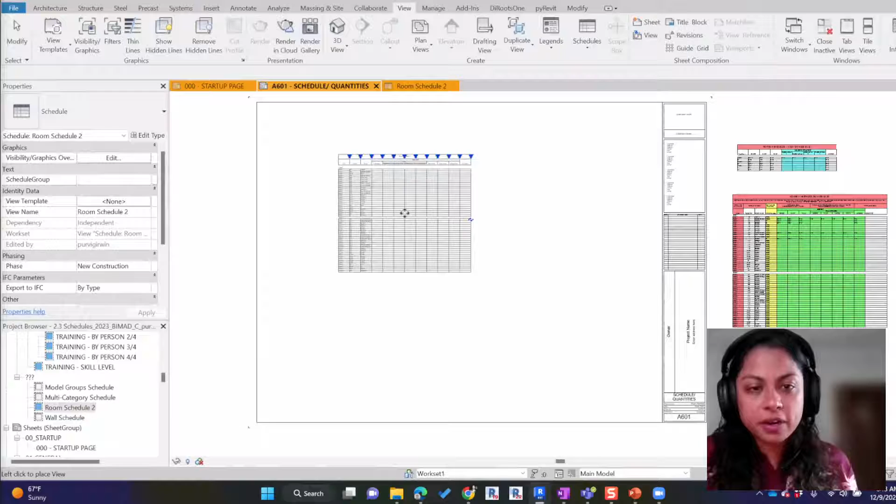Good point. All right, well then what we're going to do is take this schedule and put it on the sheet. So I have the sheet that I used for how I help organize our presentation. I'm just going to drag it up here. You can see that color on the sheet.

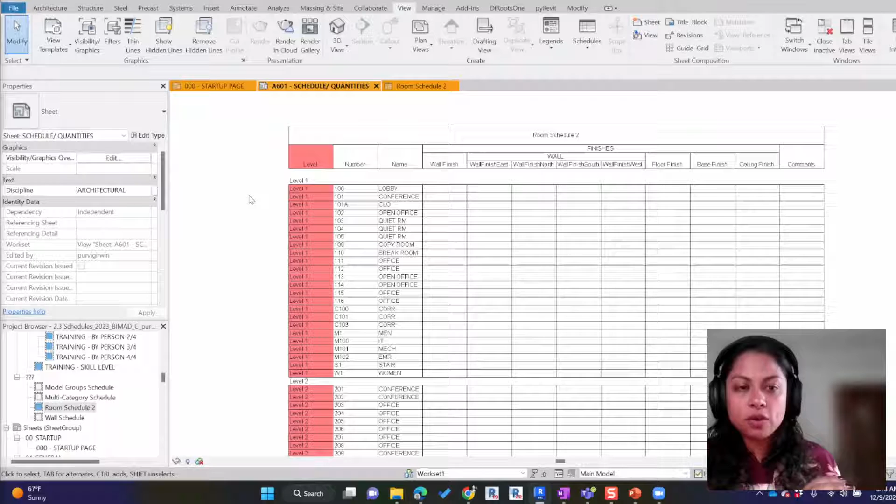Now, one thing I kind of wish Revit had was a working view and the sheet view just in one schedule, but it doesn't. And so actually this is a good sidebar into that, in that I always have a working version and a sheet version of every one of my schedules, because I'm going to show you, I have these other ones over here that I already made that have all sorts of fancy colors on them.

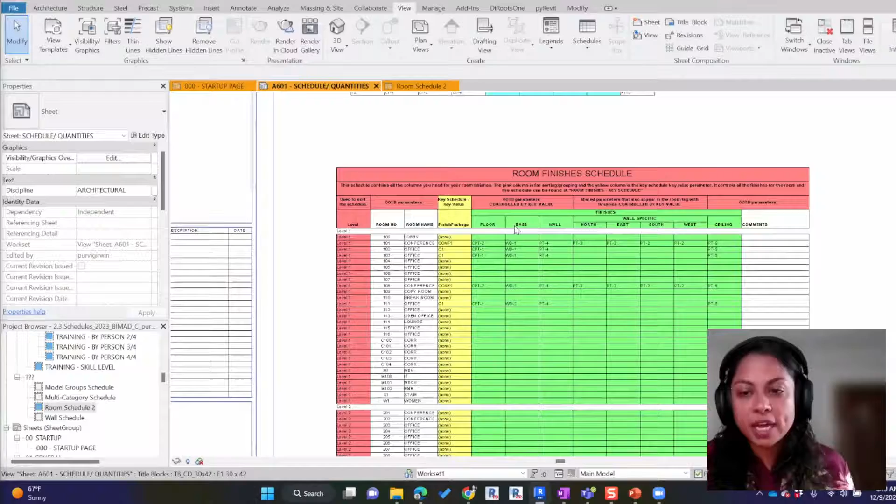You want to make sure that you have a place to share what the schedule is for. I am a huge proponent of putting as many instructions as possible into my templates so that all users know exactly what they're supposed to do. They know what parameters are for. They know where they're supposed to go to find additional information. And so that's what this schedule here is like.

And then telling people what the parameters are doing and where they came from, so that you look at it and immediately know without having to click on things. I hate having to click 5 clicks deep to figure out what something is, because the more clicks the user has to do, the less likely they are to actually do it, right?

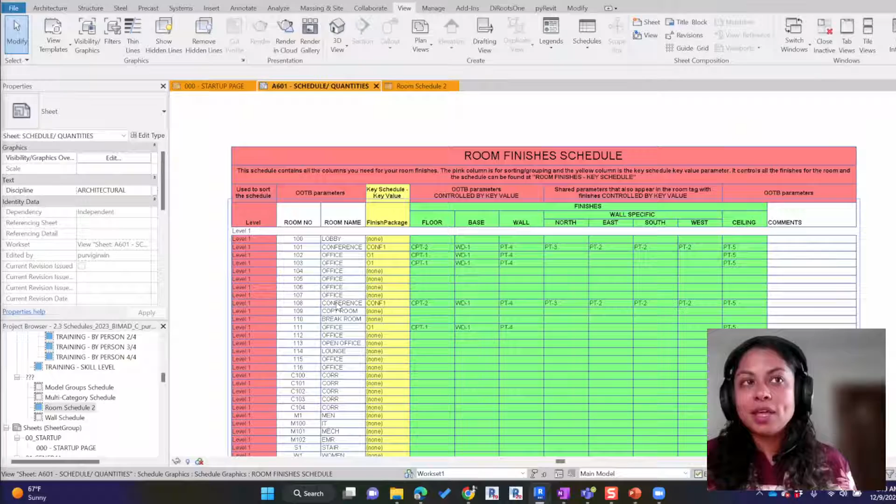I've spent my entire career trying to help people be more efficient in Revit. I started using Revit in 2008. The firm I worked at, it was like the second Revit project in the whole firm. They sent like 15 of us to Revit training and then stuck us all on the same project. We learned a lot.

Me and a friend of mine, she had learned it in grad school, so she knew a little bit of Revit already, and she and I just sort of embraced it and became the model managers after only having used Revit for like 9 months. We were like, we care, we want to make sure this is efficient, and we just took it, and everyone else was fine to let us have it. No one else wanted it, so it was fine.

But we really figured out a lot of these things to help other people understand the workflows in the software, and this is the best way, right? Because the BIM managers of the world spend a lot of time - their job is to make everybody else more efficient. And so if you can find a way to do that easily for everyone to access, then it's more likely that they're going to follow the office standards that you've put together.

The more it's just here, right? And that's why I like these working schedules. They're bright colors, you can put instructions in them. And then it also leaves the sheet ones as they are, so that your graphic standards for your company are maintained. Nobody's messing with any of the graphics of the sheet schedules. They're on the sheet already, they have the right columns, they're the right widths and everything. And all of the work happens in the working schedule.

And because of the magic of Revit, the information is in both. It's the same information, it's just shown a different way. So I like that idea.

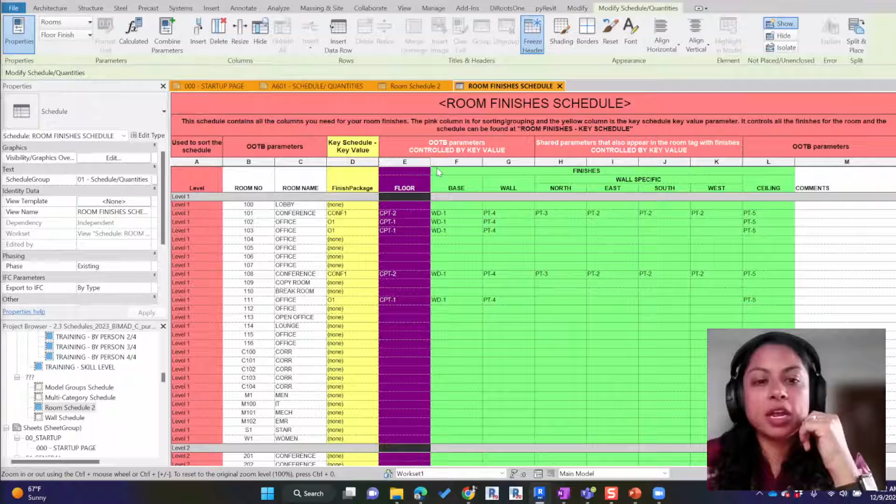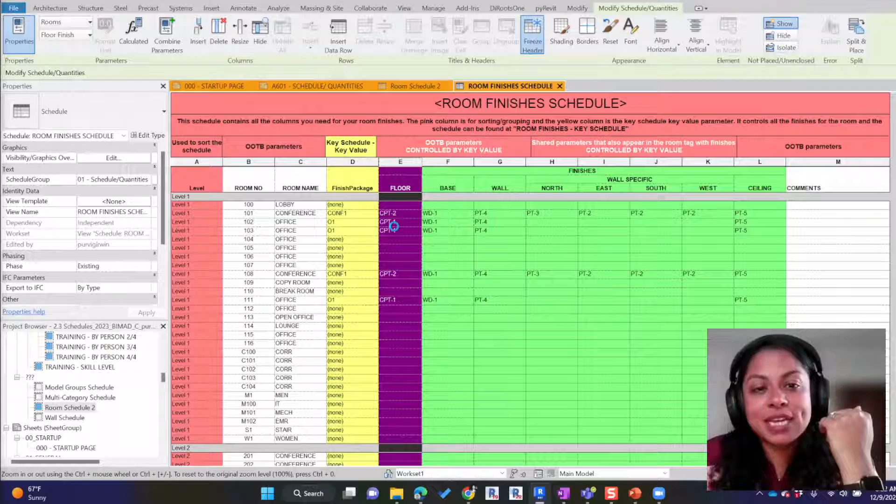For sure, I can show that. That's a good point. So if you want to make this column narrower, you could just drag it, but that's not very precise. As architects, we're probably all type A and want everything to be the same. What you do instead is select the column, go to the Columns tab, and there's a nifty resize button that tells you the current width. You can just type in, say, half an inch, and it does it.

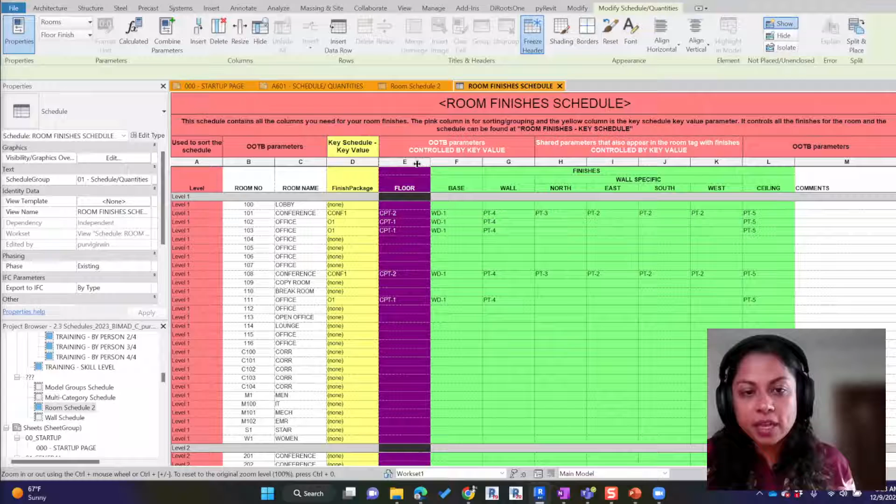Now let's undo that. Say I have all of these columns, 8 of them, and I want them all to be half an inch. I can select all of the columns, go to resize, and it tells me it's 8 inches, and I want to make it 4. It's going to equally divide all of them. It's like magic.

And so you can very precisely figure out the overall width of your schedule. I've done this for clients - they say the whole schedule needs to be 12 inches wide. So I make it 12 inches, then go back and make each column fit based on what type of information is in that column, so everything is a deliberate width instead of just dragging it, which isn't precise at all.

And it doesn't even snap, I don't think, in the sheet view. When you drag, it doesn't snap to anything. Same thing in here - you can just drag it, but it's not the most efficient way.

So I see a little bit in the chat about view templates. That was a good question - I want to give credit, but the username is 'online for 2 hours'. The question is about view templates and whether they hold the column width and stuff.

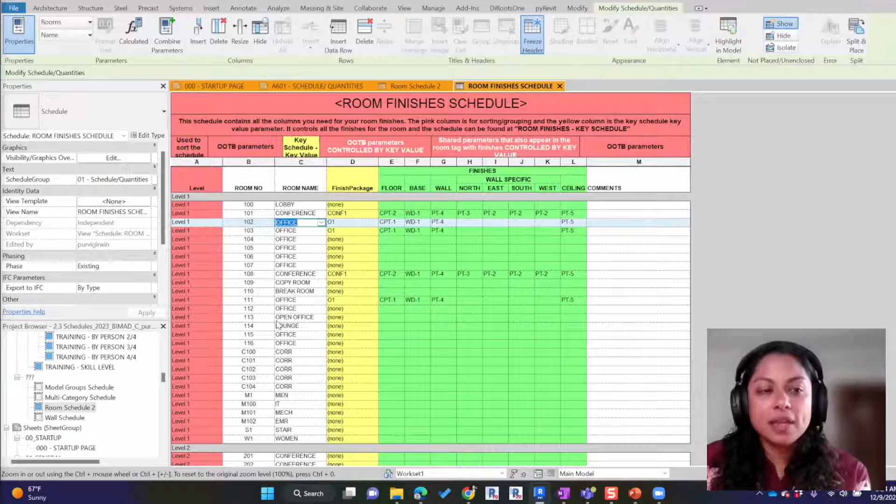That's a great question - within schedule views, what can you templatize? Let's look at view templates. If I go to schedules from my master view templates and switch to 'see schedules', you can see these are the things you can schedule. Unfortunately, you can't templatize the width of the columns - just the stuff that appears in those property tabs.

So for the most part, if I'm making a view template, I might do something with appearance, because appearance covers the fonts - like if I want to see the grid lines, the striped rows, the title, the headers, and whatever text styles are for those. That's actually really nice to be able to set.

What I discovered when I was putting this presentation together is I pulled schedules from a whole bunch of different templates and other things I've been working on, and they all had different text styles based on whatever that company wanted their styles to be named. So what I did is I made a simple template with just the appearance tab and those styles, and applied it to quickly clean up the text styles in those schedules brought in from different places.

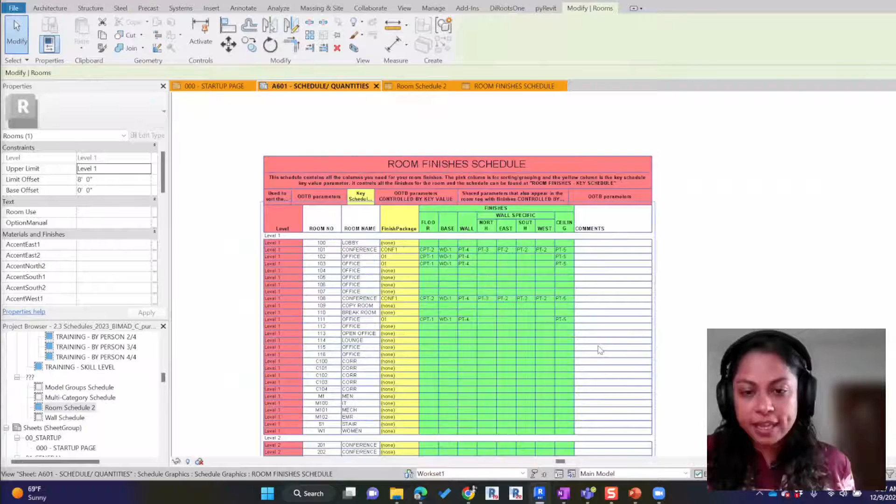In the newer versions of Revit, they made it possible to split a schedule so you no longer have the old problem: if your room schedule is too long, you'd have to filter it for level equals first floor, put that on one schedule, then do a second schedule for the second floor, and so on. You don't have to do that anymore, because now when you go into your schedule and slice it, it actually turns it into two different schedules.

Let me do it with this one so you can see it. So if I split this, now if you pull this out, you can see it's now two separate little schedules, and you can put them on different sheets.

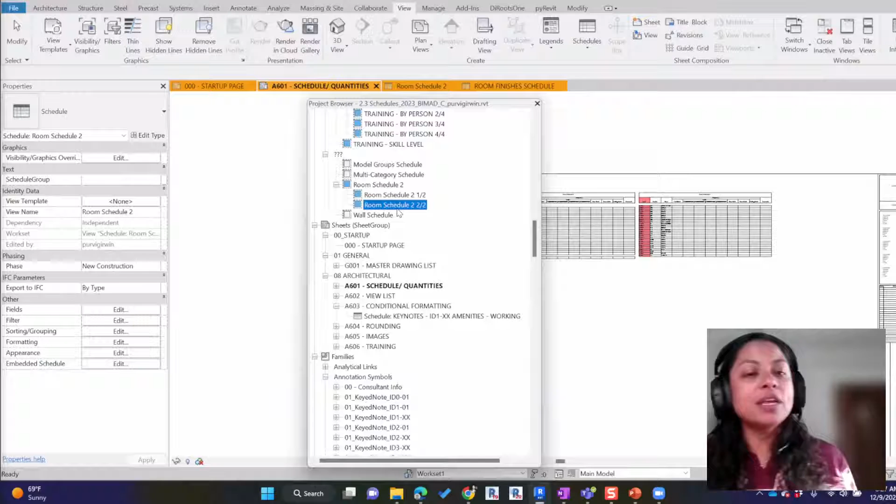That used to be something I'd have to do by hand, and now you don't have to do it anymore. You can literally just split it and put each one on a different sheet. So I could remove this one from this sheet, click on it, delete it, and put it on a different sheet. They made that much easier, so you no longer have to do the silly filtering thing.

I'll also add, for me the only time I've ever used templates for schedules is when I have a project with a lot of design options or a lot of phases. Then it makes it easier to group and hit that, because if you've got one design option as one thing, you can assign it. But if you've got different variations of design options, it's super easy to have all of those selected within that template and just use that to apply it.

Sean Page mentioned that if you create a template from a current schedule, it holds the column widths. I think I see what he's saying, but the problem is if you make a schedule that doesn't have the same columns or properties, I don't think it matters. So I'm not really sure if that's the case, but yeah.

Cool, all right, let's keep going. This is awesome. Yeah, I'm just reading through — if there's any questions I'll go through them. Looks like there's a few coming in.

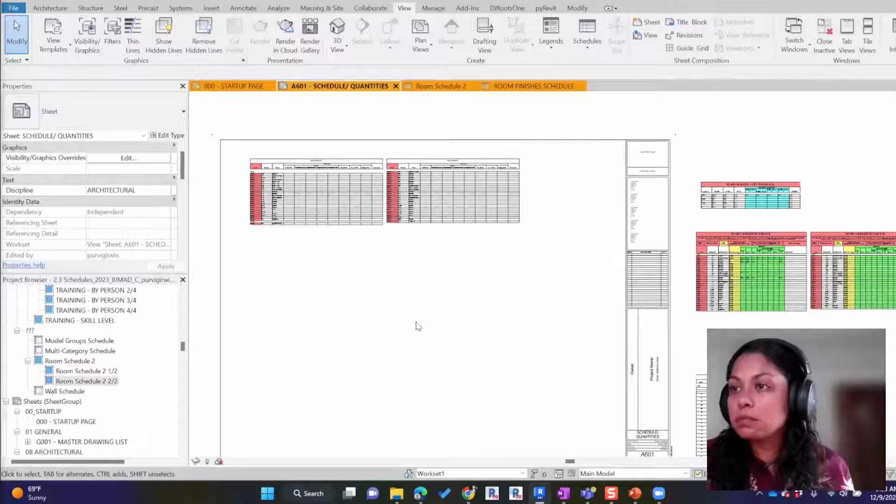Okay, somebody mentioned FF&E schedules — any hot tips for that? But I feel like maybe we should hit a couple other more basic topics before we get to FF&E schedules. Yeah, so let me go into a couple more things.

So we talked about changing the column width, we talked about adding color. One thing I want to talk about before we move into that more specific stuff is the header, because I think you saw that schedule where I had all these different rows and columns in the header, and you'd be like, oh, how did you do that?

Now this I actually didn't discover myself. I had one of my clients when I was a consultant in the U.S. I went to the office one day, and she was like, look what I found — she'd found a way online to add additional rows and columns to the header. Me and the BIM manager were both like, wait a second, hold up, what did you just do? We were like, okay, this is really cool, but before you do it anymore, let us make sure it doesn't break anything.

So I went into some research, and I found out that it doesn't break anything. So we were like, cool, and I started using it. This was back in 2018, 2019 when we discovered this.

Basically, all you do is click in the title, not the header, but the title. Then up here you can insert a row—go to insert, and choose above or below. Click here to make sure you're in the right spot, and it will add a row underneath, which you can make a little smaller.

Then if you want to merge these together, you just click and drag, and there's a merge/unmerge button up here. Like that, and you can add that information.

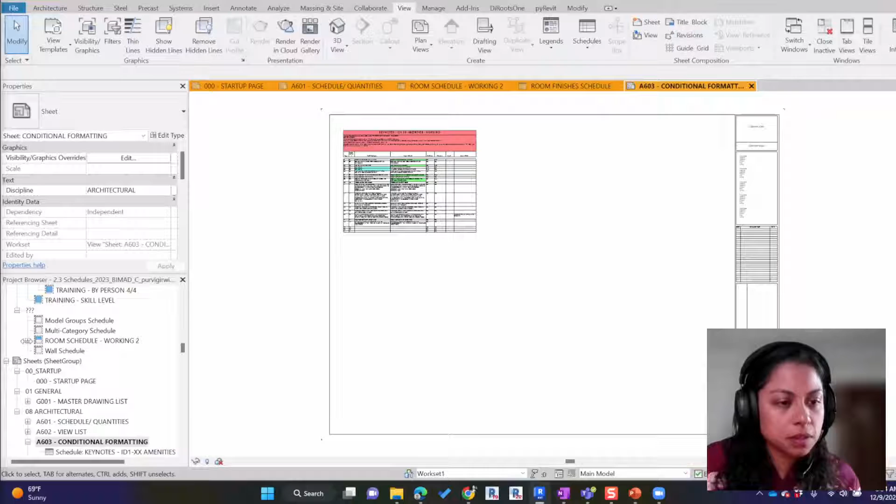This is fun, I never noticed that. I was literally just gonna say the same thing. It shows a half square. So if there's 8 of them, is it gonna show like an eighth of a square? Or is it only showing half a square? Let's see, wait this is fun. No, it's still just half.

But if you have it on two sheets now and you wanted to remerge it... so I guess like if I had this one on this sheet too, and then if I did this, it'll take it off the other sheet. And that may be kind of where Kelly was getting at. It's kind of goofy. Interesting.

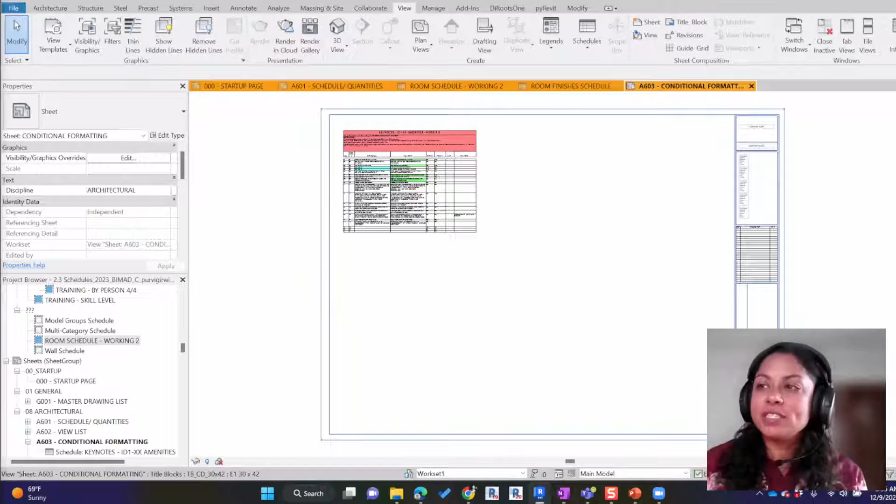I see some fun questions in the chat, and some of the answers to your questions are in my handout, which Jeff will give you a link to afterwards. Good 65 pages worth of stuff. There were two questions about character-specific stuff, so I guess maybe we could talk about that, which is one about showing a dot and the other one about showing character of a specific component.

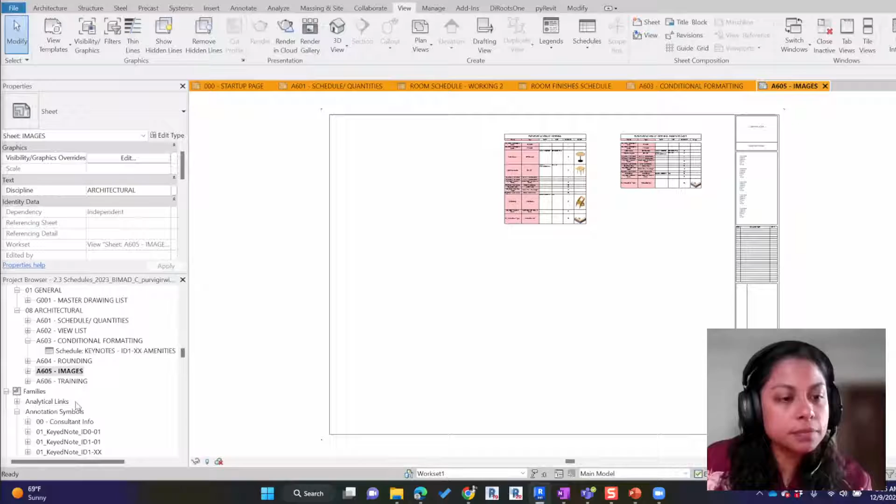I think what Joe Buchek is asking is if you were to make a schedule, like maybe a light fixture schedule where you show like a square with an X and then like a troffer, that's a graphic type of schedule. And it looks like DH Designs is asking about adding dots, which is a funny one that I went through, and we'll get into it. I could tell a funny story about dots, but first let's go through your thing.

Let's start with the dot one because that's relatively straightforward. This is my list, and this is usually where I've seen people want to have a dot - there's a revision, or I'm including it or not including it, so you have a parameter that's a yes/no parameter for the revision. Now Revit does that silly thing where if it's a checkbox, then you look at it on your sheet and it says 'yes'. It's super annoying - it's not what I want to see. I want to see a little dot.

In my working schedule - and again, this is a beautiful use of a working schedule - I have all these colors, all these different things that tell you what things are for. My purple ones are the checkboxes that are a project parameter that go with my sheets, and then this is just a calculated value. So let's go take a look at that calculated value. I'm going to edit it.

All you do is a simple if statement: if revision 1, so if it's yes, you take a special character from your character map, whatever special character you want to use, and put it in there. Because it's text, you have to put it in quotes so that it knows it's supposed to display it, a little box. Otherwise you just put 2 quotes and blank. That's it, it's literally that easy.

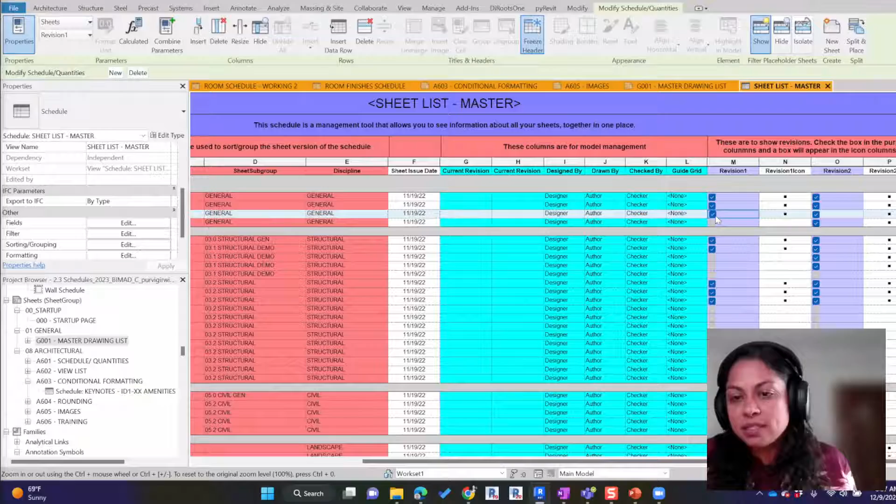So if we come here now, if I check the box, it just adds the dot, and if I uncheck the box, it takes the dot away. And that's a great example of the working schedule, because what you're doing there is creating a sacrificial column that really has the data, and then you're using the if statement to show what's needed.

The funny story I had was that Revit for a while didn't support special characters in a schedule for quite some time, and when we made the move to Revit back in '11 or '10, at this bigger firm, that was like an end-all-be-all for them - not having dots on the door schedule. They had 2-hour and dots, and we battled for a very long time. I think we eventually got them to agree to just put Y's in the schedule until we finally were able to do dots. It's a funny story because a few years later they finally let us use special characters, but I couldn't believe you couldn't just use special characters even then.

Not that I necessarily agreed that we needed the dots, but whatever. I can't remember. I mean, I guess if you could do bullets in a text box, then theoretically you should be able to do a special. Yeah, I guess it did. I know it for sure didn't support it whenever that was, because it was extremely frustrating. Because anyone at that time was looking for an excuse not to use it, so that was their excuse not to use Revit.

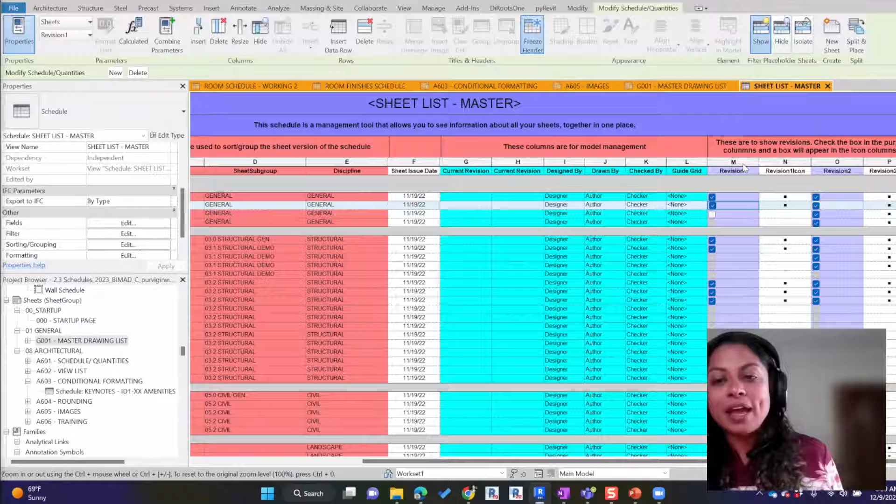So I don't know, but one important thing I do want to mention is that because it's a calculated value parameter, it's schedule specific. So this is where you need to be very deliberate about making your schedule. Usually what I do is make my working schedule and add literally every column I think I might want, then duplicate it and delete the things I don't want, or take away the colors, or hide them. So in the sheet version of this, all of these are hidden, these are hidden, these purple ones are hidden. You don't want to delete them, you need to hide them, because the formula stops if you delete them. That's a great point, it has to be there, else your formula will break. And that's the reason I make them colors, so you remember you need to hide them.

Got it. And so that is one dilemma you have to think about - if you make your working schedule and your sheet schedule and then add a calculated value parameter, you either have to add it in both places, or make a new sheet version and clean up the graphics. Which you choose to do really depends on the magnitude of the changes you need to make to your schedule. If it's one thing and it's faster to just make that parameter in both places, do that. But if you added, say, 12 revisions, it might be faster to add them in your working one and then duplicate it and change the colors, rather than remake all of those parameters. So it's really six of one, half dozen of the other, depending on your own personal skill, how fast you are at this, and how much reformatting you'd have to do. So that's just one of those 'it depends' situations.

And the working schedule - this is kind of what DH Designs had a question about, where it lives. Do you have a working schedule sheet too, or do you just keep it in the schedule view typically? No, I just keep it in the schedule view. So this particular project browser is set up based off of the presentation.

So things are grouped by the different views. But what I usually do is in my project browser, I'll have three sections of schedules. In, I think it was 19 or 20, they added the ability to do your own browser organization for schedules. So I'll have project info ones, which I actually do want to talk about, I'll have my working ones, and then I'll have my sheet ones. That way they all kind of stay together. It's done with a custom parameter I like to call schedule group - I have a group one, a sheet group one, and a schedule group one. I make them separate just so everybody knows what they're for. You could make it one and assign it to all of them, but for me it's easier to call it that thing. So that's this parameter right here, schedule group. I just do those three typically, and I put numbers at the front so it orders the way I want.

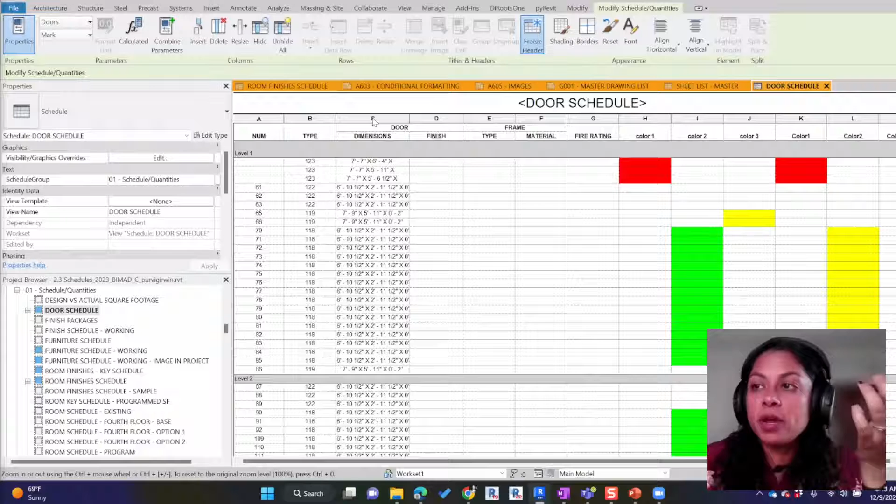The place that I use it the most is actually with door dimensions, because sometimes you might want to have the width, the height, and the thickness all together in one cell. I have that here in this schedule. Actually, let's make a new one real quick, I think it'll be a little bit easier.

Rick just mentioned schedules are a great selection tool as well. It's a good point. When you have those project information schedules, like rooms and stuff, you can select in the project information ones, then say select in model. That's super valuable too.

So I have this schedule, door number, let's make it really simple. I'm going to go in here, and this bottom button of these four is the combine parameters. You click on that, and over here you get a list of all the parameters you have. So let's say I wanted to do the width first, I'm going to add the width, then add the height, then add the thickness. Okay, so these are parameters.

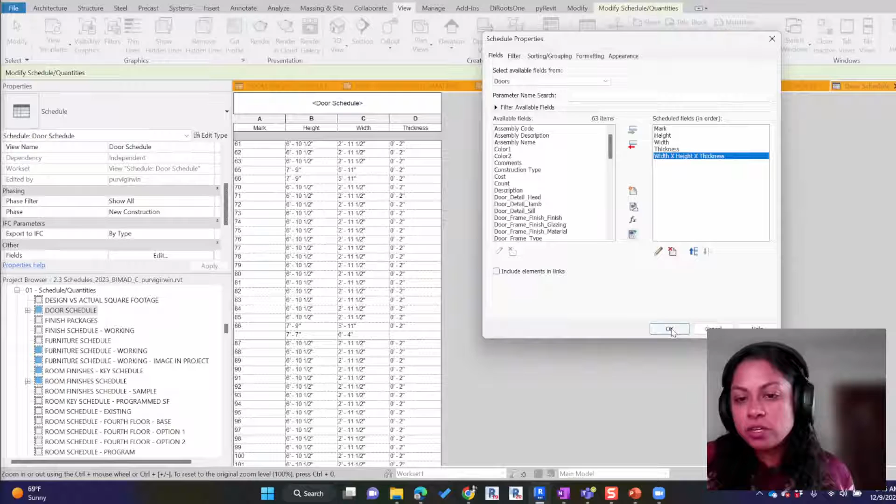This is the separator in between. Let's say I want it to be an X. Now down here it's going to show you what it's going to look like. Actually we don't need one there, that's at the end. If you want to have a space, you actually have to put a space in here, it's a little bit hacky, right? You can see at the bottom this is what it's going to look like. Then you just say OK, and it adds that here as that combined parameter, and then it puts it there.

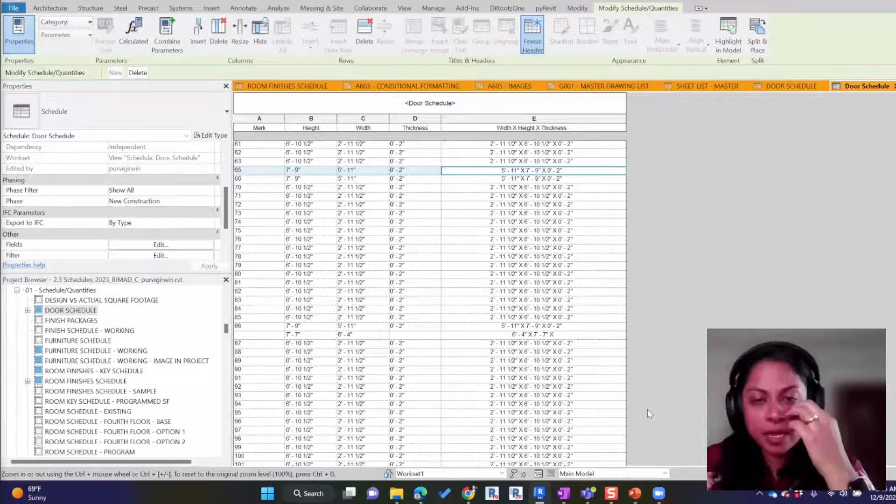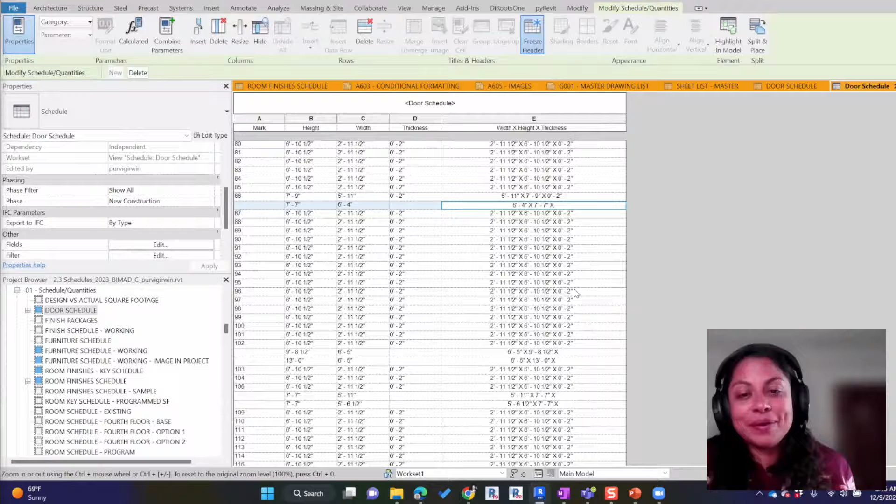You can center it in the schedule if you want. Now, one thing I do want you to notice is that curtain panels do not report thickness. So if you look down at this one, it's a curtain panel door, so it does not report the thickness. Curtain panel doors have their own issues. Curtains in general have their own issues, but they're also the coolest things ever, so I don't know, awesome.

That was great, I appreciate you doing that, because when I was reading through the handout, that's one of those things I thought about as something a lot of people don't even realize exists. So I think maybe to take it to the next step, we can head back to, I forgot who asked the question about graphics, Joe I think did, but it could probably work its way into a conversation about the FF&E schedule too, as far as how that works. Maybe riff on that a little bit.

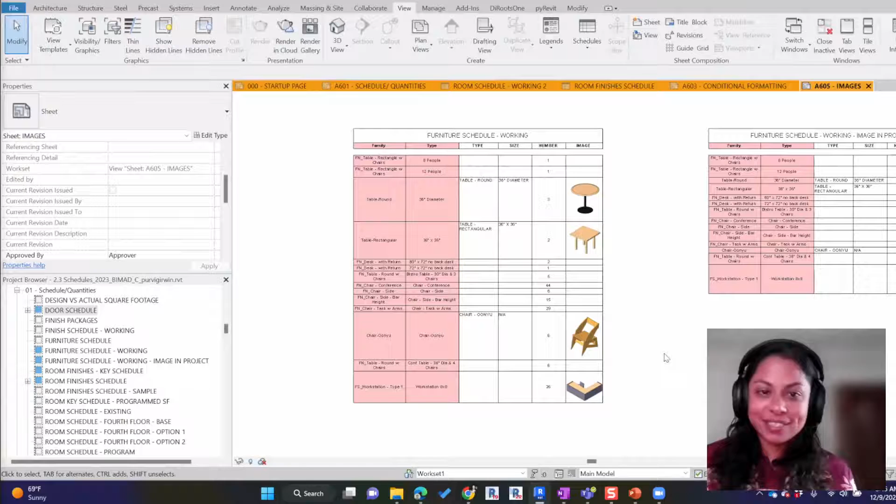Yeah, there you go. So this is adding images to your schedules. There are two different ways that you can add an image into your schedule. The image can either live in the family itself, or the image can live in your project.

Which you choose to do is really up to you. If it lives in the family, it's going to make the family bigger. If it lives in your project, you have to manage images in your project. So I'm not going to tell you that one is better than the other. It's really going to be about your workflow and which one makes the most sense for you. So this is the one where the images live inside of the family.

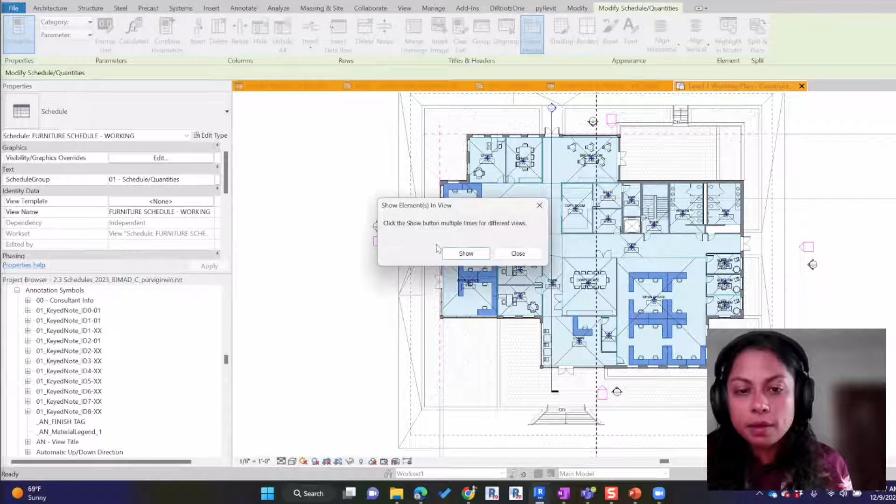So what I'm going to do is open up, let's find one of these. Okay, so I have this lovely little workstation. And in this family, when I go into the types, there is a parameter under identity data called type image. And this is just a little PNG. I like to use PNGs because they're small and easy to deal with. You just browse to wherever it is, find it, and add it in.

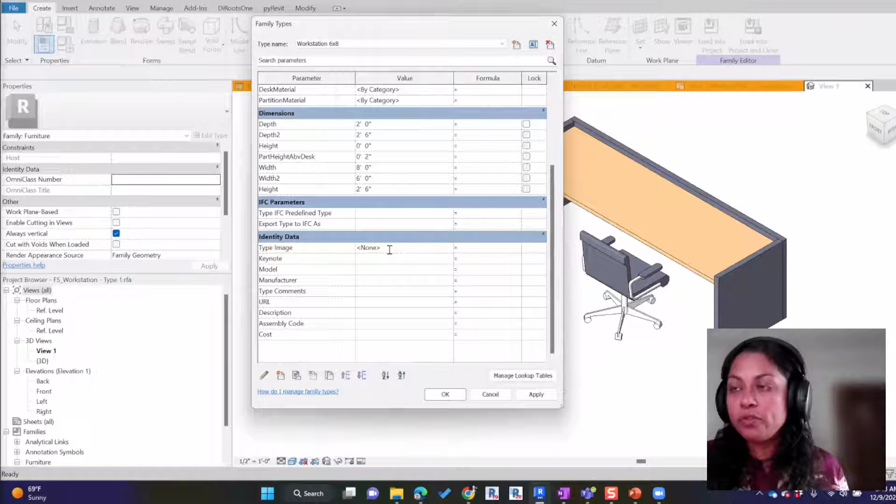Now, this is a type-specific thing, so you can put a different image for each type if you want. I'll leave that up to you as to what you think you need to do. But it is a type parameter, so you can make it different for each type. So you put it in here, and now it lives in the family, so you don't have to manage it in your project. It's just in the family. If you put that family in a different project, it's there already. So that's kind of the pro of that, it's kind of in there.

To me, the biggest con is the family size. But as long as you keep the image small, think about how big it's going to be on your page and size it appropriately. So don't make it like a 5 meg image. Like 200 or 300K is probably fine for this tiny little thing that's going to be on your drawing.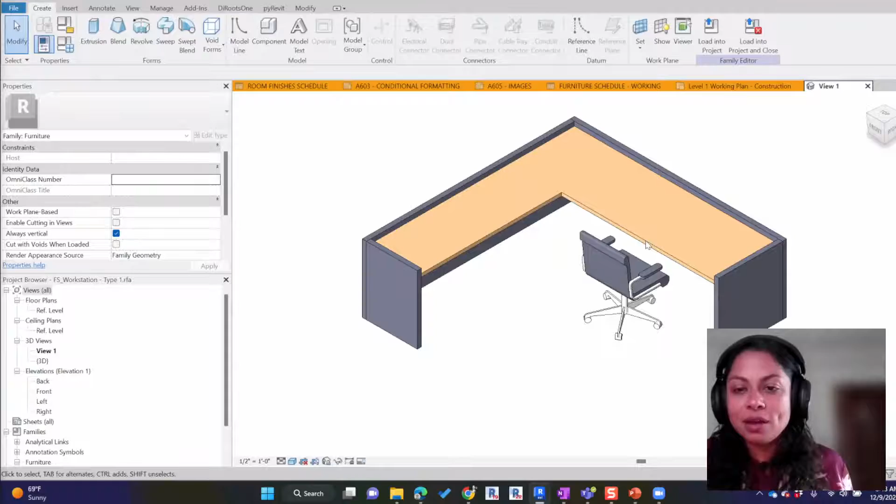And once that image, because I know the question's going to come up, I'm going to ask it anyway. Once that image, when you do this method through the family, is loaded into the family and saved, do you have to worry about absolute location of it for referencing? So if you sent the family to me, is the image there?

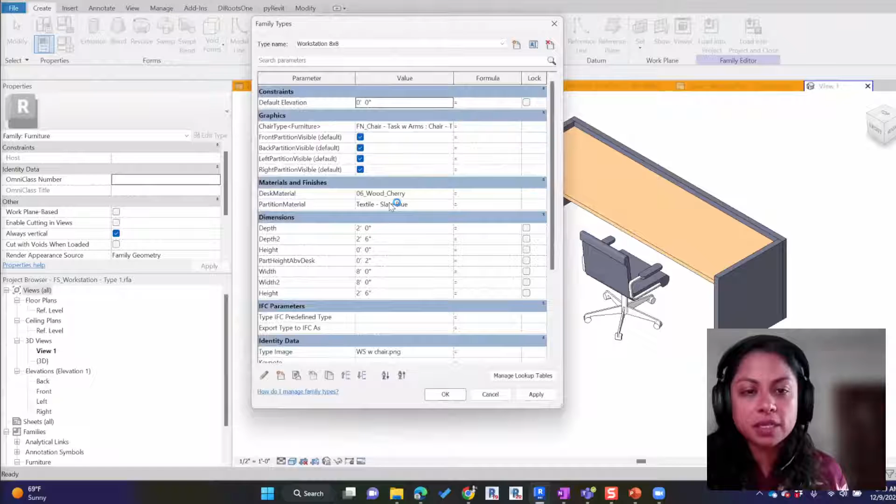But I think that it's embedded in the family.

Yeah, so the audio cut out for a second there, Purvi, but I heard you a little bit.

Purvi was basically saying yes, it should get baked into the family as far as we know. I want to bring that up because I think that's a good thing, because usually one of the bigger issues with images in Revit is making sure that you don't lose it when you're sharing it between computers with paths. That's a good point, and I actually haven't checked that one. We need to go back to verify if that's the case.

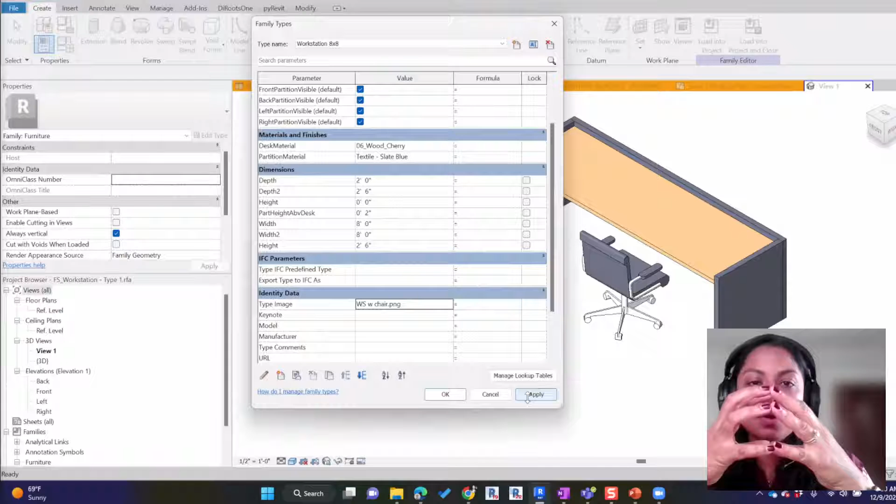Because I think, in general, families are self-contained objects. So once you put it in your project, you don't really see where it's from. I could go... but I'm not sure. I think it's still...

And what I was going to say in the very beginning when you started talking about images is just in general, images suck when you work with them in Revit. So just be ready for that.

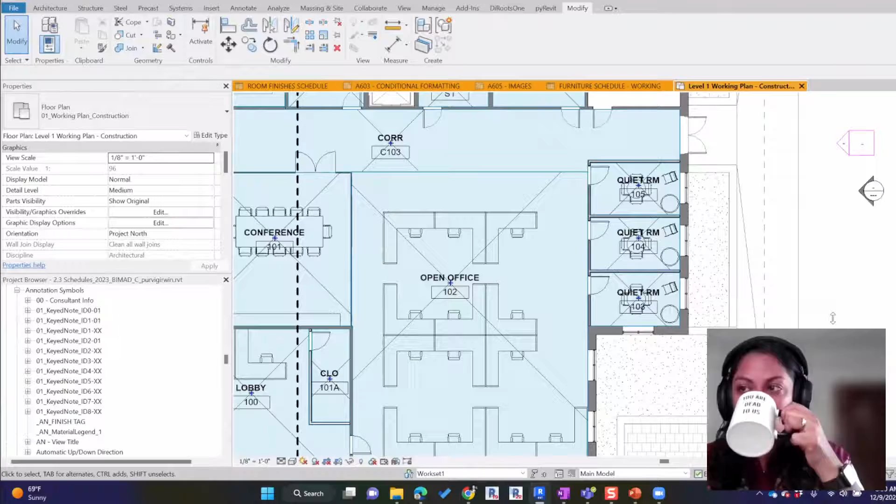But I think I'm losing your audio though. So Purvi, maybe disconnect or reconnect the mic or something. It just sounds distant all of a sudden. Or maybe switch the audio in the mic and then switch back. Let's see what that does. I don't know if everyone else is losing it or if it's just me.

But I guess while you're doing that, I think in general you're probably better off hosting those images in a shareable location for project users no matter what, just as a rule of thumb. I would imagine, just in case it does come down to it and you get a whole bunch of missing image errors.

No, now it's gone completely. Okay, there it is, coming back now. Is that better? That's okay, better, yeah. Oh, there we go. Now I hear you again. Wait, can... microphone... Nope, now you're gone again.

Oh, I think you're back now. Okay, there you are. Maybe it's the computer. Yeah, maybe the headset went. I think my headphones got mad. It sounds like it, that's okay.

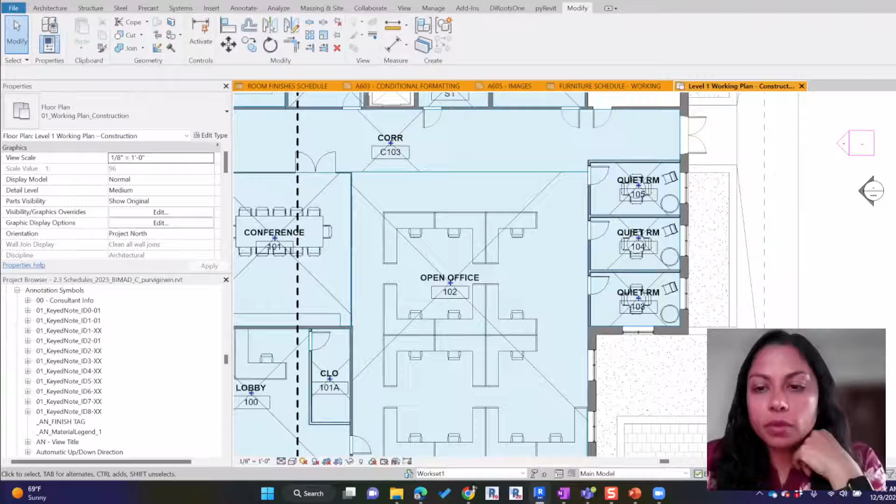For sure, yeah. You can still hear me fine now, right? Just using my computer speaker now. Okay, yep. So that's if it's with the family, right?

But you can also host it within your project. Let me go back to this one. So when you go into your schedule and you're in the fields, this type image parameter is the one that comes from the family, so that is a type parameter. But if you want to put them in your project, you have to use the parameter that's just called image, but the image parameter is an instance parameter. So you want to be careful about this, because if you assign it to just one instance, and your schedule is not itemized, it's not going to show the image.

I mean, I lean more towards keeping it in the family just so it goes with it. But again, it's really going to depend on how you're using it and how you want to manage those images. Something to note too is that the interesting thing about the image parameter is that it's available on a ton of categories out of the box, which is neat, and you don't have to go into each family, edit it, save it, load it back, and all that stuff.

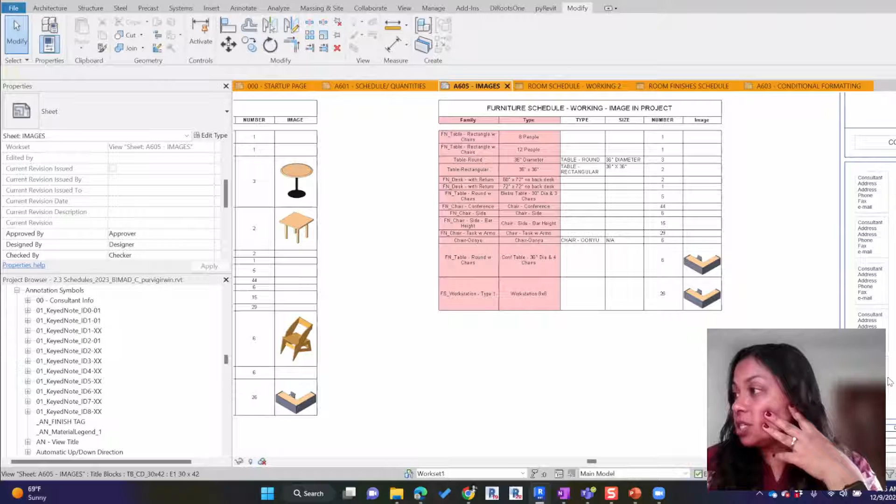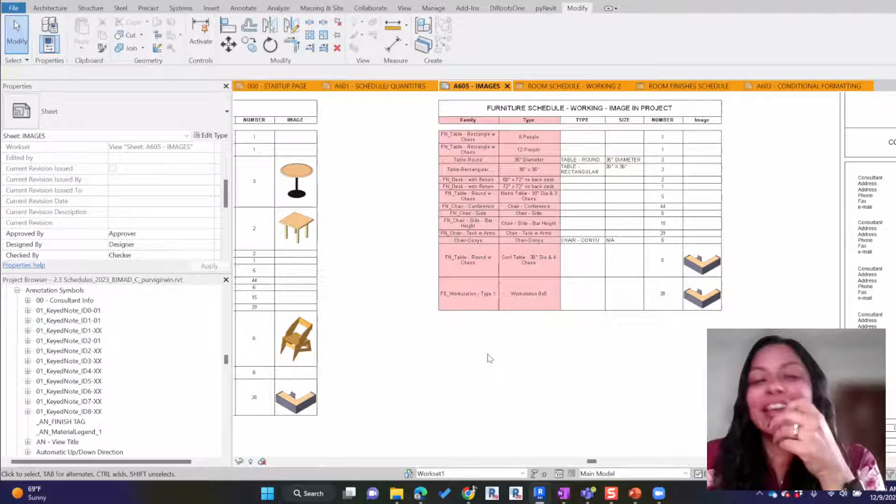All right, let's see, I know we have a lot of questions. I don't know how much more time - what are you thinking on time? I mean, it's morning here for me. You've got all day, right? Let's see where we're at in another 5-10 minutes or so. I'm looking through the questions now. But I think as I read through them, if there's anything else you want to jump into, feel free. But I'm going to keep reading through these here.

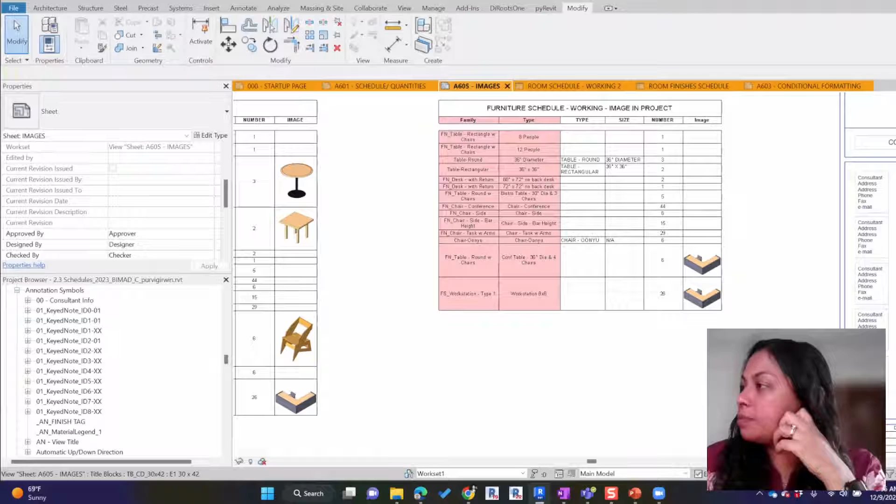I definitely - so we've got over a lot of the basic stuff. I don't know if folks are interested. I see one about conditional formatting, so we can talk about that. Yeah, sure, we can jump on that for a little bit.

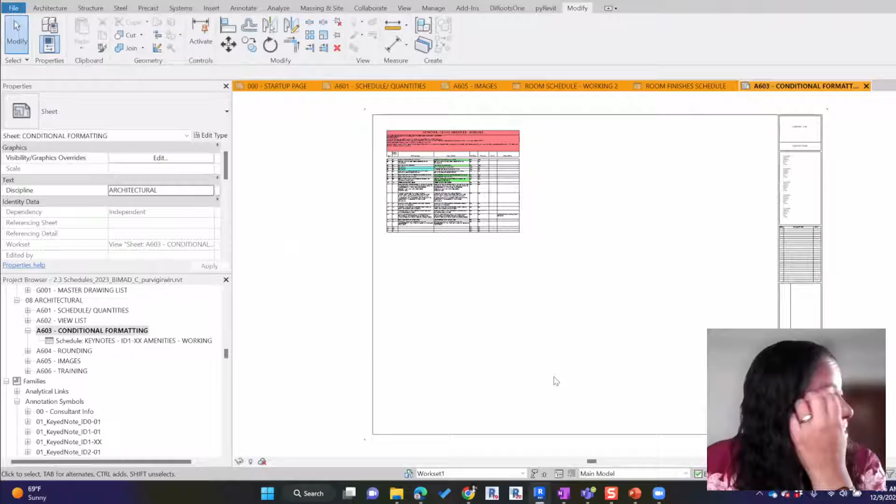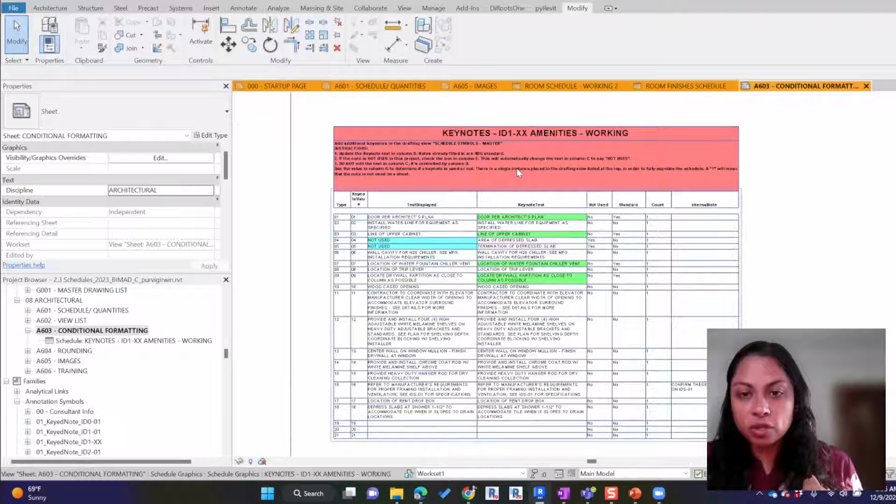Okay, so let's do that one, because I have this example that was super fun for me to make, so I like to share it. I had this interiors firm I was working with that didn't want to use Revit keynotes, but they wanted to have keyed notes, right? So this is a generic annotation workflow. This schedule is what's called a note block schedule. So just a quick background on note block schedules: note block schedules are a schedule of generic annotation families. Generic annotation families are the ones that appear here under symbol - when you go to place a symbol, those are kind of the things that show up. The beauty of a generic annotation family is you can throw as many parameters in there as you want, and when you bring it into your project, it doesn't actually add them to your project.

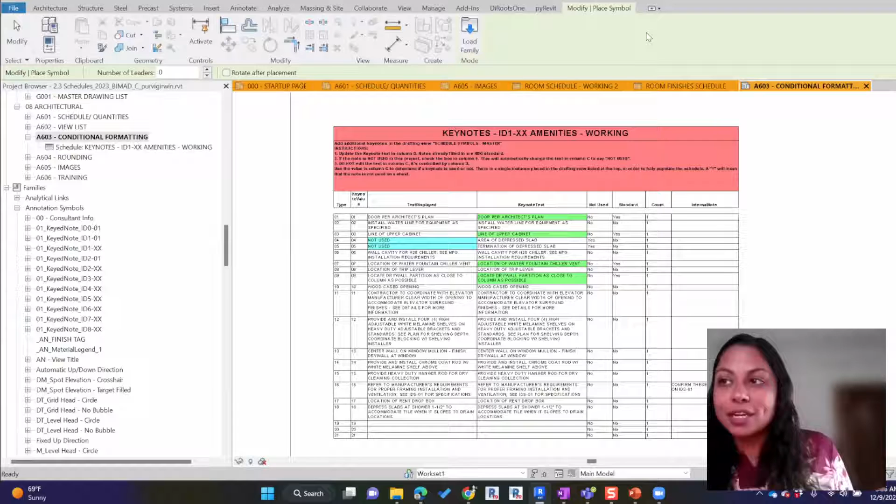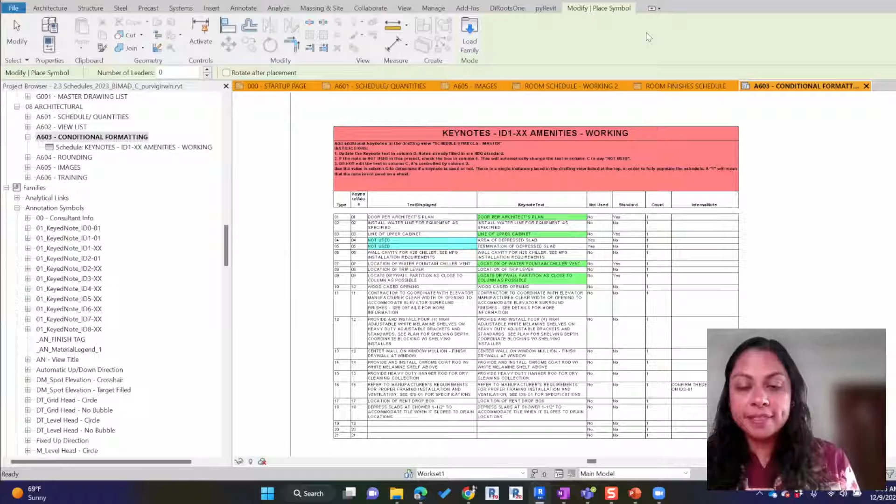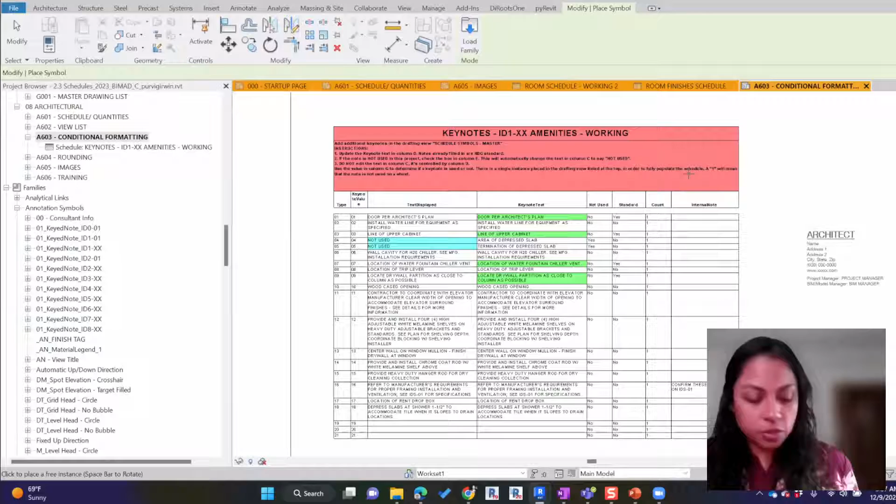So it's a great way of making what I like to call a smart dumb schedule. You can use it for keyed notes, you can use it for material schedules. My method for a material schedule is these generic annotation objects with a note block schedule. But I used it here in this particular example because this particular client had a set of standard notes that they wanted included in their template, but they wanted people to be able to say whether they actually wanted to use that note or not.

So in this schedule, this generic annotation family has these little yes, no parameters built into it, and not used, and standard. If the standard box is checked, it makes this keynote text green, so people know this is a standard note and shouldn't be changed. This should be the same on every single project. And if you end up not needing to use the note and you check this not used box, since it's a type parameter, you'll get a pop-up and it'll change this to say not used. So in the schedule that goes on the sheet, you're going to see this text displayed parameter and the keynote value, and all the rest of this stuff is hidden.

Now, the way that this coloring works, and I can go back a little bit more and talk about this family if people want, but basically... oh, I lost my properties. Things open at one time.

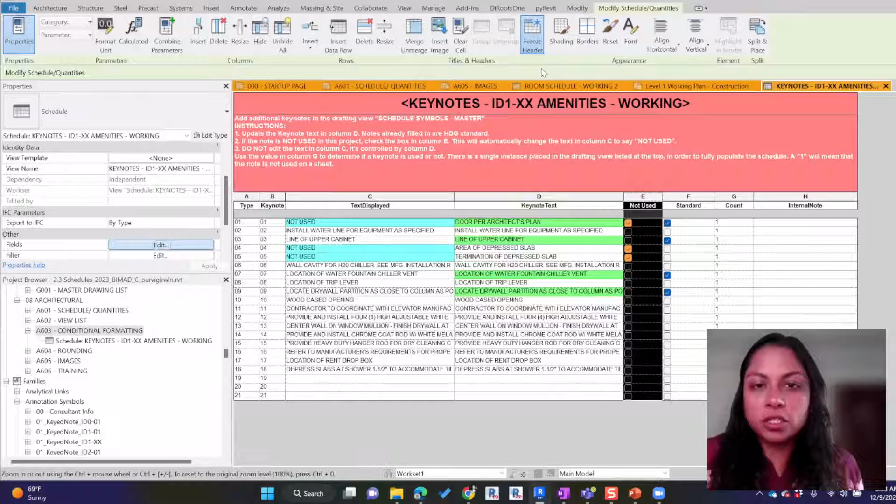If I go into my formatting, and I have the text displayed parameter, and I go here to conditional formatting, basically if it's not used equals yes, then it's going to change it to this color. So basically, you just pick the parameter up here, pick like over here, equal to and the value, and then you pick a color. That's how I have that one. And then the keynote text one just has the same thing, and it's green.

So does that make sense? Hopefully that makes sense to folks.

Yeah, that's awesome. The idea there is highlighting cells based on conditions. Do you guys do that for anything? I remember we had multiple plumbing fixture counts or something where it would flag as red if it went above a certain value. That kind of stuff can all be done with conditional formatting.

Really cool. I've done that for room schedules where if I have a specific program and a specific room needs to be a specific size, that's what this schedule is. Over here, I can put in a programmed square footage and then the actual square footage, and I can say if this value...

Now, what you have to do is actually make a separate calculated value parameter that takes the program and the area, does the math, and then says if it's greater than or less than 0, because you can't say if this parameter is bigger or smaller than this parameter directly. It has to be greater than or less than 0. So that's the weird rub with that particular one, but it can still be done.

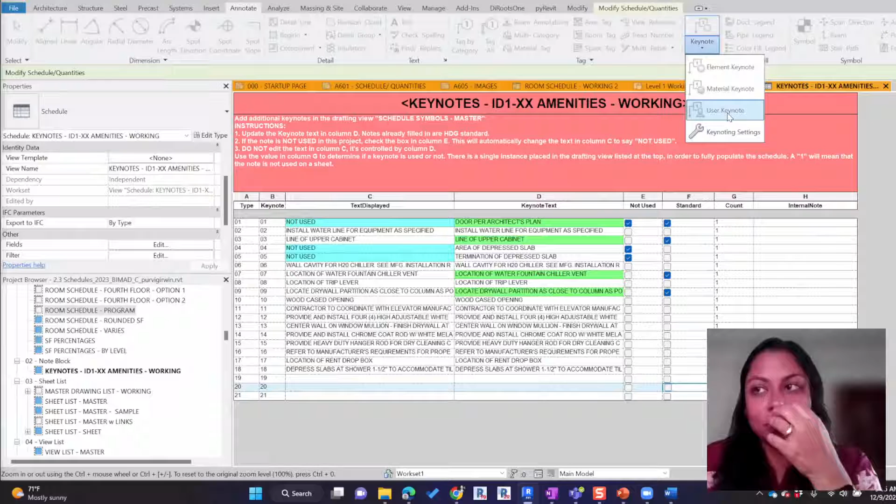As the production person, it was a waste of my time. But I do have to say, if you don't properly teach people how to use them, it can really mess things up. But it's not that hard. If you click on a keynote, it tells you over in the properties what type of keynote it is, whether it's an element, a material, or a user keynote. And if it's an element keynote and you're not sure if you want to change it everywhere, just delete it and put in a user keynote and be done with it.

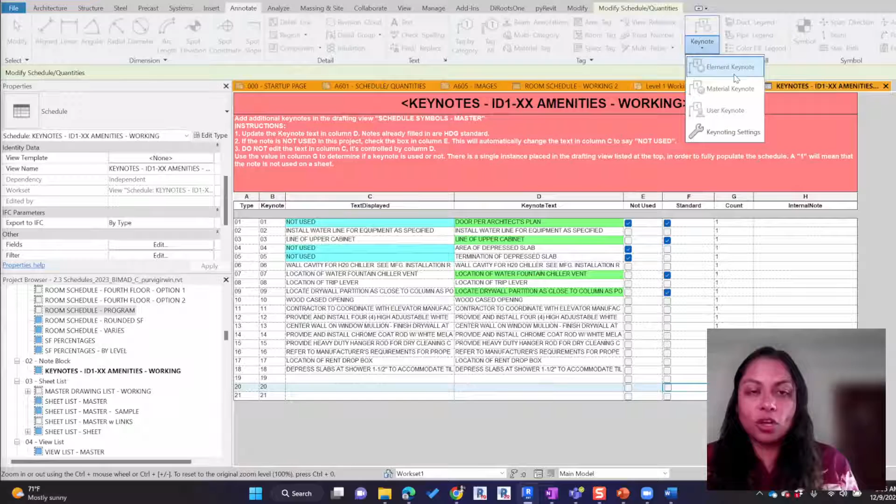I personally love making things super smart, but you have to look at your team as a whole, the workflow, and how willing your users are to try and learn new things versus just wanting to get it done and go home. So really, how smart you make it depends on the enthusiasm of your team to also be there with you in making it smart and efficient.

And the support of those above you, telling everybody you need to listen to the BIM manager, because they made these standards for a reason. That is literally their job, to make yours more efficient. So maybe you should listen to them. Anyway, that's my BIM manager soapbox.

I don't think anyone's going to argue with that. So we will finish with one last question, a good one that Chad just had, about how to make schedule headers vertical versus horizontal.

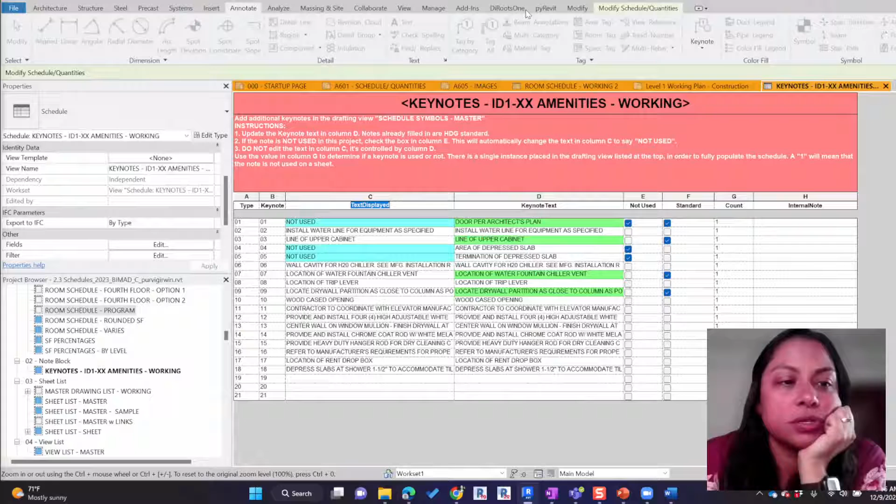So turning the headers - if you go into the formatting tab, there's a button right here. You just click on the field, and then you can change it to vertical right here. It doesn't show here, and that's probably my biggest pet peeve - it doesn't show in the schedule, it's super annoying. But it does show it here.

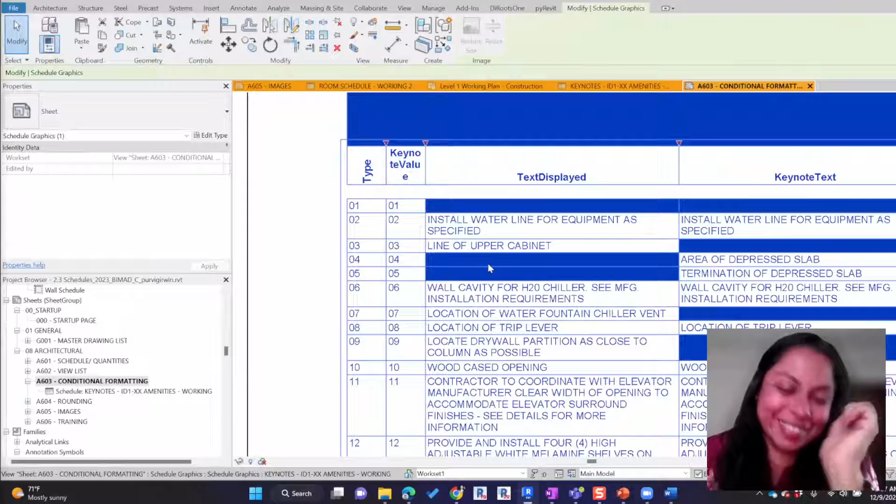That would be nice to see in the schedule. It's a good question, I haven't used that one in a long time. I remember there are very specific schedules where people have been using that for a very long time. So hopefully, Chad, that helped you.